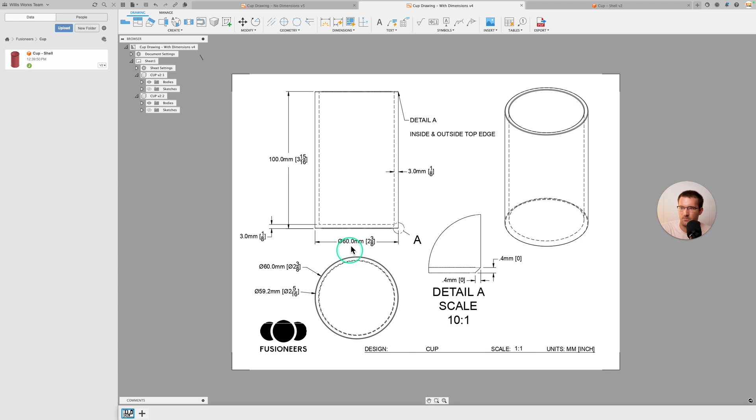So this is what we're going to be making and the dimensions of all the aspects of the part. And just to be clear, the best way to make a cup, in my opinion, is the shell method. It's the most straightforward, but again, I like making these videos where I basically show different ways to make the same thing just to demonstrate that you can kind of get to the same endpoint in a lot of different ways. So let's go ahead and make a new design, and this one is going to be called Cup Thin Extrusion.

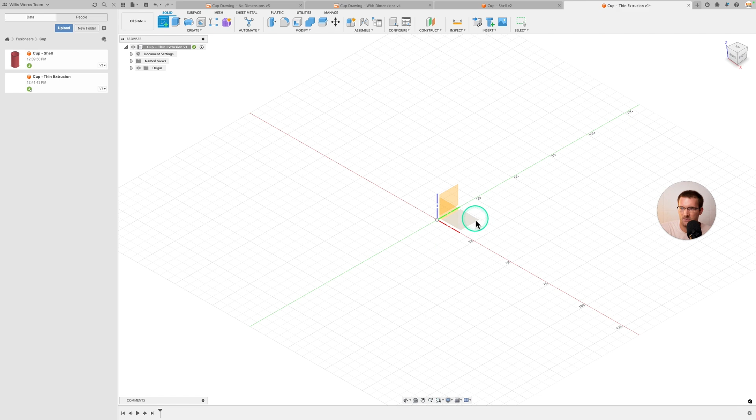We'll start off by turning on the origin, and then we're going to make our same sketch as we did last time. So select the bottom plane, click C, which is the shortcut for center diameter circle. Make sure that we have it snapped to the origin here, then left click, and then just draw it out as far as you want. And then we're going to click D for dimension, and we're making this a 60 millimeter in diameter cup. And then we're going to go ahead and finish this sketch.

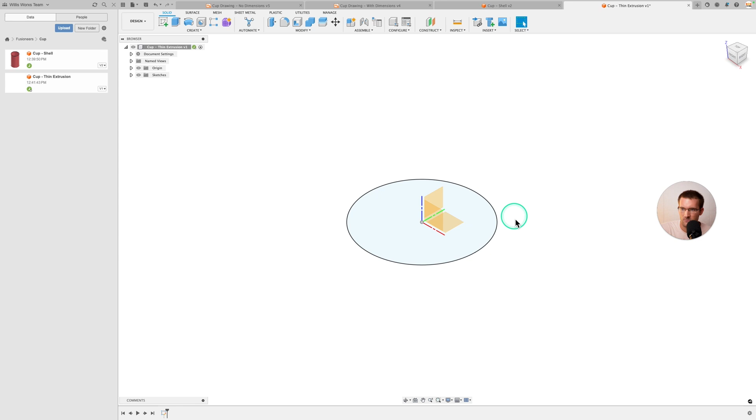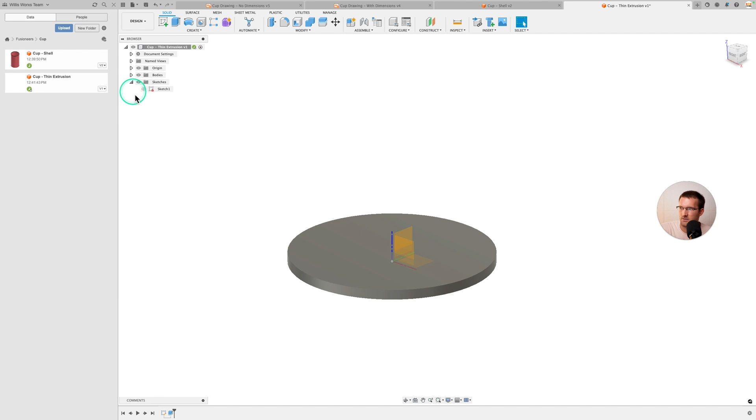Okay, and this time we're going to start off by making just the bottom of the cup. So we're going to click E for extrude, and we're just going to make this 3 millimeters because if you look at the drawing, the wall thickness is 3 millimeters, including the bottom. So we're just going to make the bottom first. All right, so now we have just the bottom of our cup, and now we're going to come back to sketches and turn this one back on, and then we're going to select extrude again.

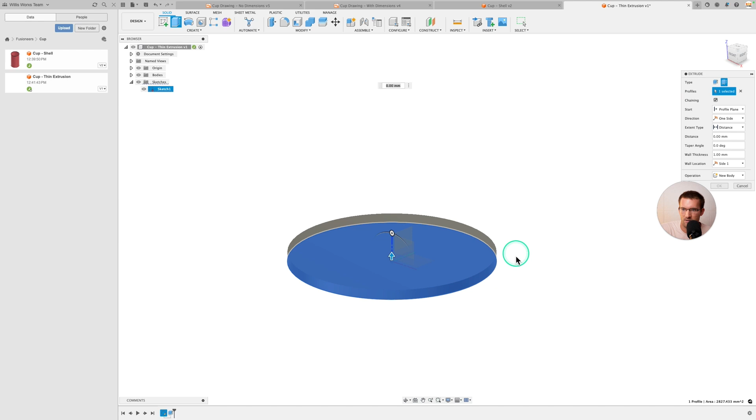And this time, instead of selecting the whole thing, we actually want to go up here, and if you'll notice, there's actually two types of extrude. There's the normal extrude, which is the default, which we just used, and then there's the thin extrude. So if you can see there, this icon is thin extrude. So let's go ahead and select that. And then it's going to ask us for our profile. And what we want to select is this outer edge profile, which is our circle. And then let's just go ahead and drag it up and see what happens.

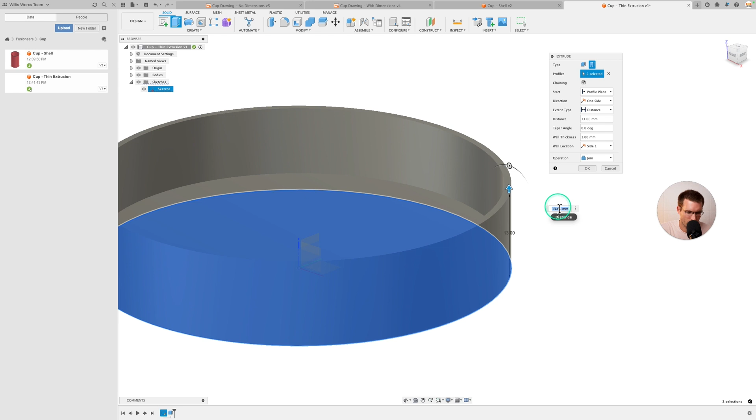So it's defaulting to cut, which if you look closely, it's just cutting away a little bit of our circle. And we don't want to do that. We want to change the operation type to join. And so now you can kind of see how we can make a cup out of this. So let's go ahead and make it 100 millimeters tall, which is how tall we want our cup to be. And so if we zoom out, you can see that the cup is now pretty much what we want it to be, other than the thickness of this wall.

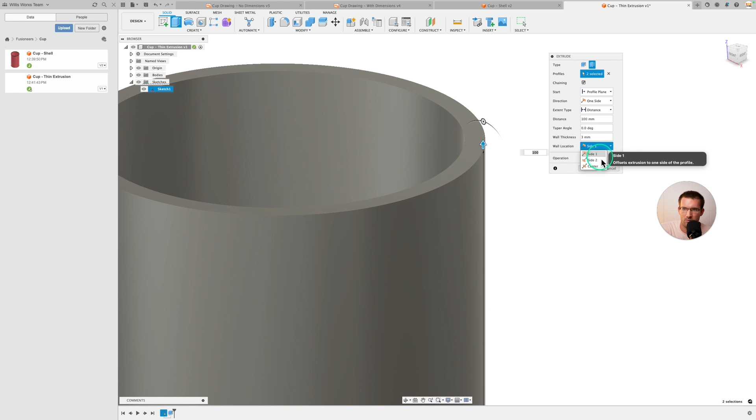So the way we change that is there's this wall thickness here. So we change this to 3 because our wall is supposed to be 3 millimeters thick. And then the wall location is correct. So it basically lets you do side 1, side 2, or center. Side 1 seems to be the right side because if we come down here, if we click command, you can see that it's flush with the wall. Let's just look at it from the side so you can get a good view. So it's extending straight up from the wall. So side 1, it's defaulted to, and that's actually inside. So if we look at it from the top, it's on the inside of the wall.

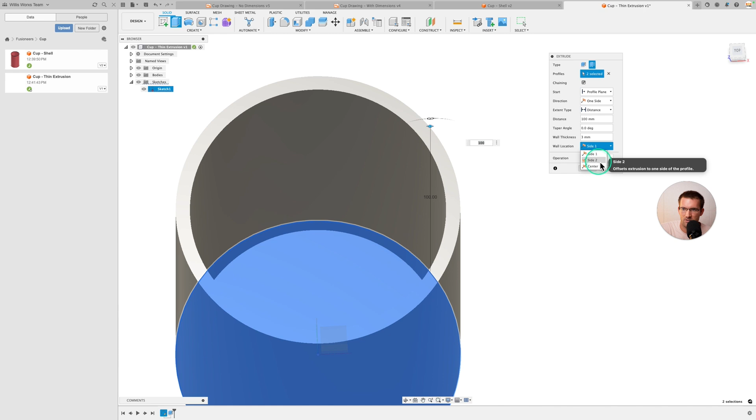And the good way to see that is if you change it to side 2, and then we look back here at the bottom, you'll see that it's actually on the outside, and that would make our part too big. So it's making the cup way bigger than it needs to be. So we're trying to do it on the inside, which in this case is side 1, and then center would just split the drawing. So let's keep it on side 1, and then we're going to click OK. And now we have our cup.

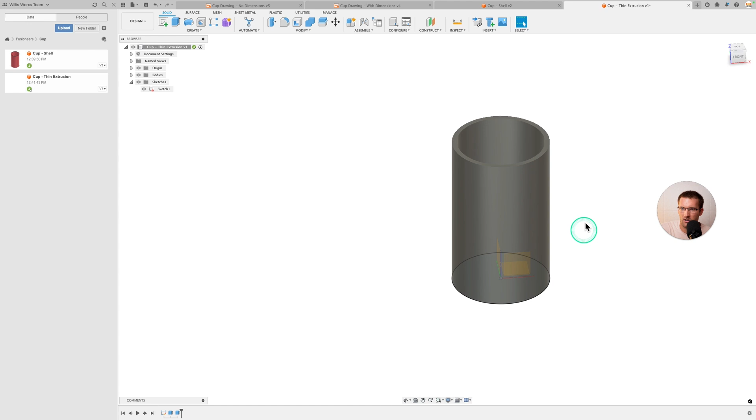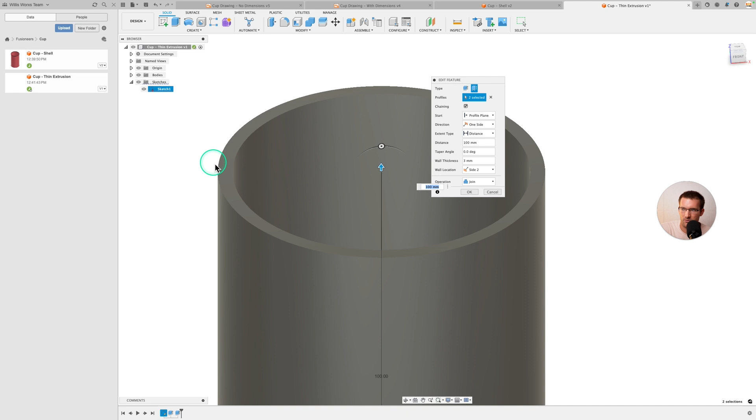And we can measure the diameter really easily just by clicking here. And we see that it's still 60 millimeters is the outer diameter, which is what we wanted. If, for example, we did change it to the wrong side, it's going to be larger than 60 millimeters. So let's change it to side 2. And then if it's on the outside, how big would our diameter be? So if you think about it, if this was 60 millimeters and now we have 3 millimeters on this side, and then we also have 3 millimeters on the other side, then it's going to be 66 millimeter diameter, which is not what we want.

But just for example, let's measure it. And you'll see down here, it's kind of as we expected, 66 millimeters, because we were going to the outside instead of the inside. So let's go back here, edit feature, and then change this back to side 1. Real quickly, we can check. It's 60 millimeters.

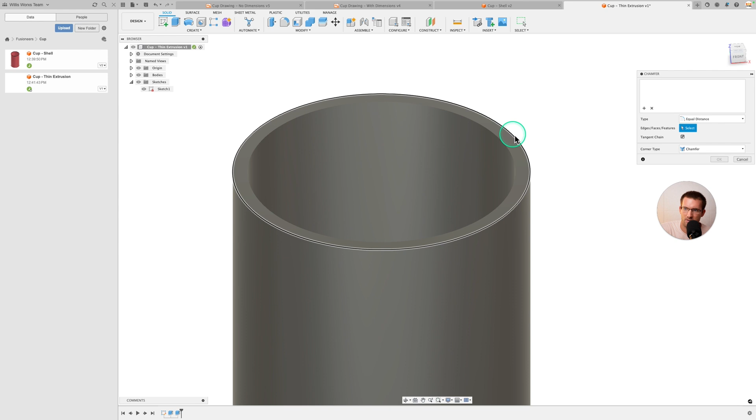As we want. All right, then the last thing to do is we're going to modify chamfer, and we're going to apply a chamfer to the inside and outside wall. One quick tip for that is you can just select this face and it'll apply chamfer to both edges. We're making it 0.4, and you see there that we've added a 0.4 chamfer to both edges, and we also want to add that down here to this bottom edge. Click OK, and that's all we want to do. So that's how you make a cup using the thin extrusion method.